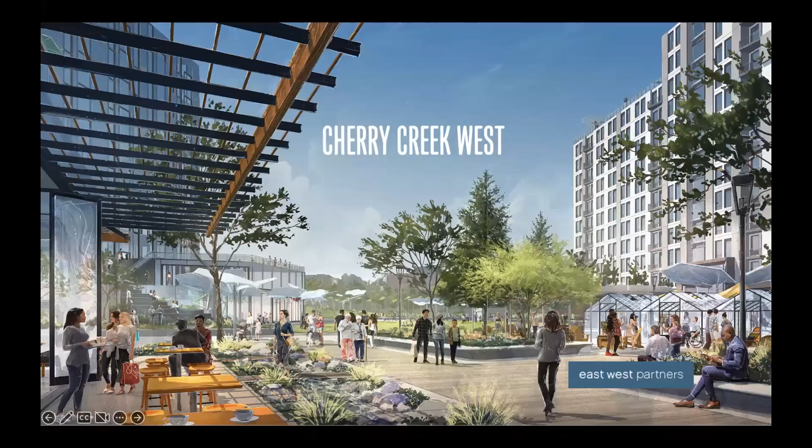Really excited to share with you where we are, and if it looks like I can share my screen, I will go ahead and do that. I assume you can all see that? Okay, great, wonderful. So this slide is one that you guys are all very familiar with.

We'll be speaking through some of our updates. Certainly we have some updated rendering to do, and I'll talk through a little bit about what the changes are that are coming from here. So feel free to ask questions as you go, but what I'll do is start with a little bit on what we've been doing for the last year, and then near the end, I'll talk about what is up to come.

So first and foremost, our progress over the course of the last year. I know you're not used to seeing a lot of narrative from me, but it feels like it might be important, these are the kinds of things that you guys will want to understand.

First and foremost, the large development review is the city's process. Laura Aldrete, the head of planning, has called it the process to determine your process. But really, the idea is that you get all of the different departments that you have to interface with as a developer together, so that they can all identify what their big issues are, and then you can hopefully go into the next stage of the process a little easier.

So that did take us 12 months. It results in a framework that then drives what we do as we move into rezoning and infrastructure planning. The key requests from the city staff were that they were looking for more of a street grid, and I'll show you what that means. It is not the same street grid as Cherry Creek North by any stretch, but it is a diversion from what our plan has today.

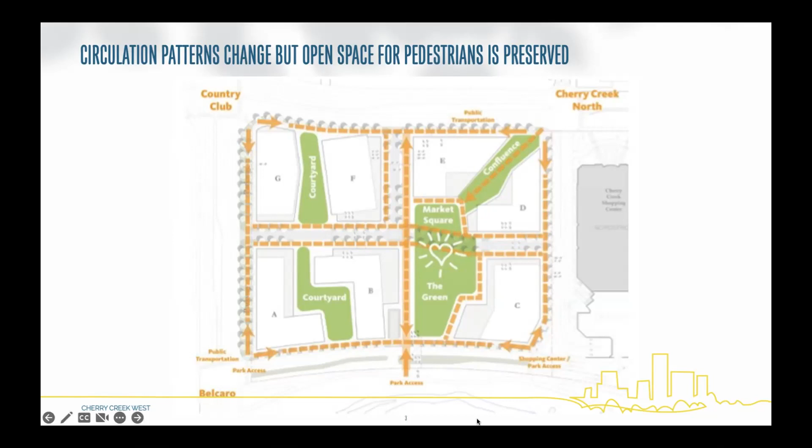In this example, what you might recall is what we had before were these entrances at the edges of each of these four key points. Those entrances will still remain as they are, still right in, right out on University Boulevard, which is really important for mobility and traffic. The same will be true on First Avenue and on Clayton Lane, but we'll have the ability to close those.

There will not be parking on the surface. This speaks again to the fact that it's been very important to us that we don't create a situation where people are circling on and off our site. Instead, they enter the single reservoir of shared parking, which we still intend to have here.

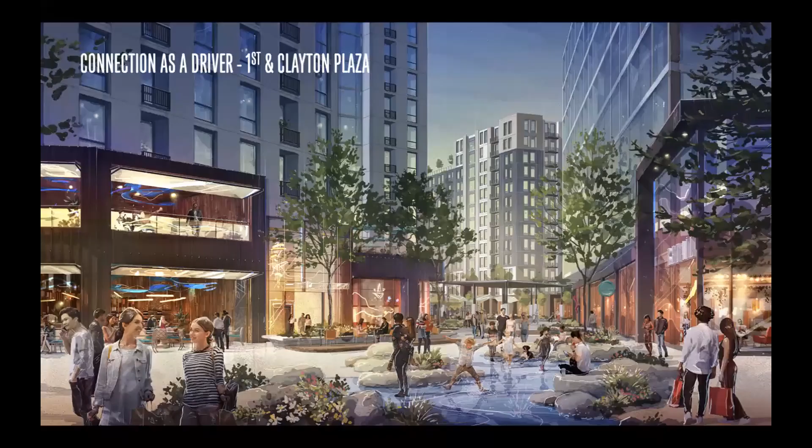So talking about the impacts on our plan: First and Clayton and that entry plaza stay very much the same. The one difference - going back a slide for a second - is that the First and Clayton connection now also has a two-way cycle connection. You can see a green line along Clayton Lane with a northbound and southbound bicycle lane, so if you've been cycling on Cherry Creek North Drive, or want to, you can connect right there and cross at First and Clayton. I think that'll be a nice experience.

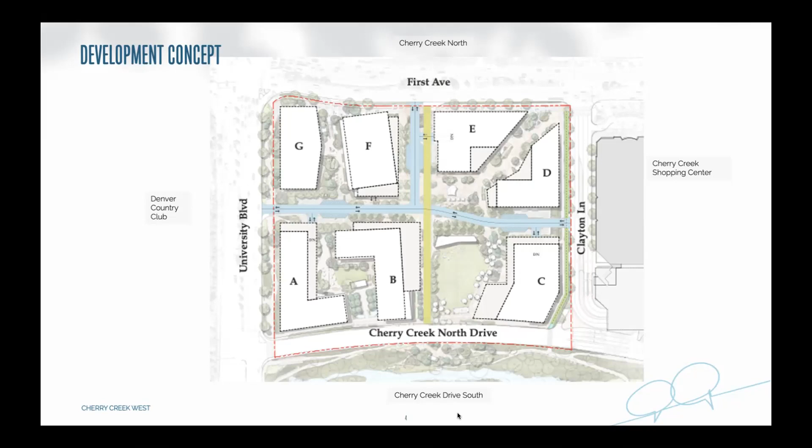We're going to take all of that onto our site because obviously nothing's happening today with the shopping center. It's one of the big sales tax drivers for the city and one of their most successful shopping centers, as I'm sure Jeremy would say if he was on the call today. So otherwise, everything we're planning at the First and Clayton entrance remains as it was.

This particular rendering is going to change a little bit, although as you can see pedestrians crossing freely at grade, looking from the north towards the south, we still intend that pedestrian connection remain flat and at grade, so cars will recognize that pedestrians are prioritized through that space. We'll be doing an update to this rendering, but that's really the difference from what you see here.

Diving into what these streets mean more specifically, when they are fully open, we will have drop-off courts at each of those locations, so that when an Uber or a delivery arrives, there will be drop-off courts at each entry point. Otherwise, if a truck wants to pass through, they'll be able to cross Market Square and the green when things are fully open, although there will be those grade differentials we were talking about.

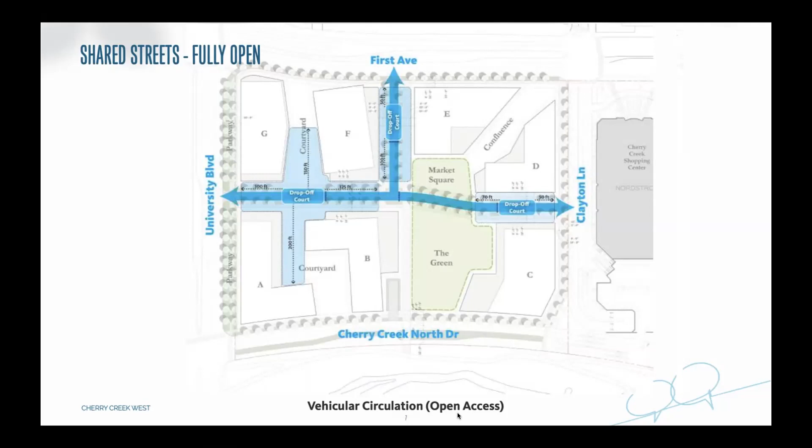You can see those little black lines, but they're actually designed to be bollards. That's where we would have the opportunity to close things off. Here's where that starts to look like what that looks like.

So here is a partial closure. In this case, you would still be able to come in, say, on University Boulevard and exit on First Avenue, but we would close that portion of the street so that Market Square and the green remain fully pedestrian prioritized and cars are not trying to transit across that space.

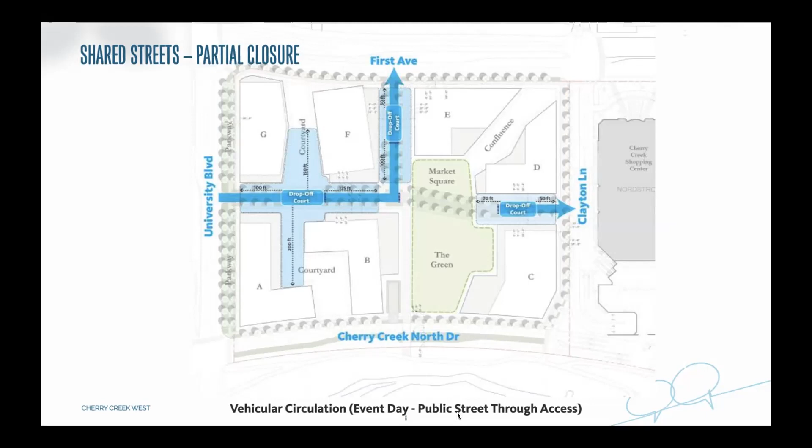And then finally, our fully closed version, this is the one that looks most like what everybody has seen since the beginning, where in the event of a significant event like the farmers market, or really a lot of the other events that could happen here in Cherry Creek West, we can really pull the traffic back and out away from the center of the site. So those are really the three conditions we imagine this can be worked through, and how those streets will function in those components.

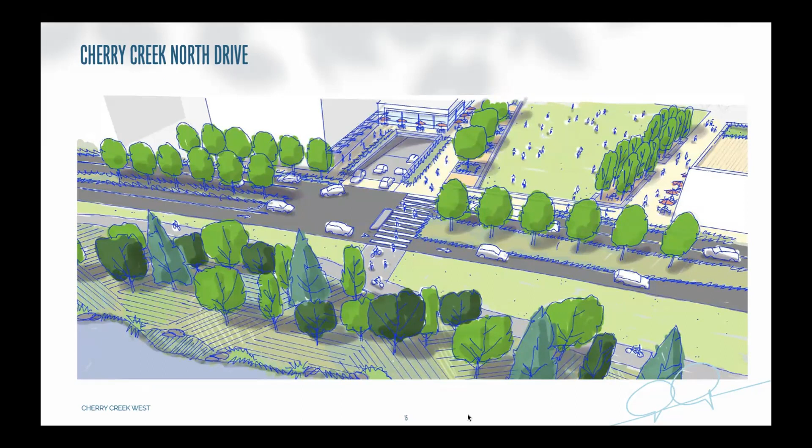Here's another view of that a little bit up close. It doesn't show the little pavilion lid we imagine over the parking, but it gives you a sense of how that crossing might feel from a pedestrian perspective. What this doesn't show is an alternate paving that really shows that as pedestrian prioritized, which we imagine we would have. That would be one alteration we'd make.

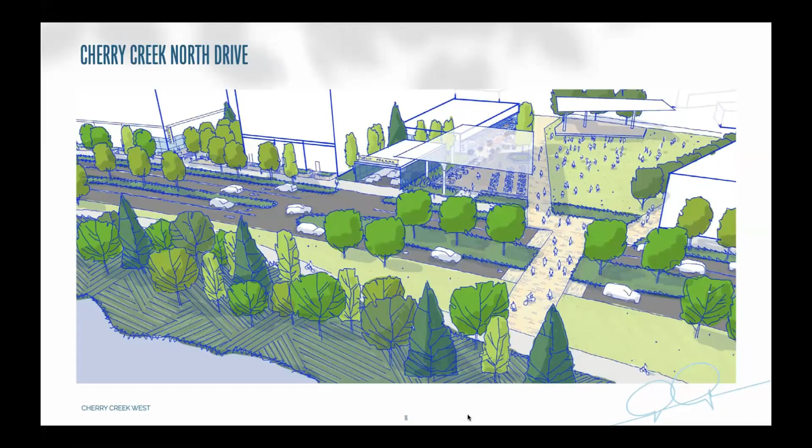This drawing shows that component a little bit better, but shows another possibility where we actually pull that pedestrian access point over to the east a little, allowing separation from the public parking access. That could have benefits from the standpoint of safety and clarity, and it centers that pedestrian connection right on the green space too. It would then potentially have a little additional outdoor space, separate and off to the side, which could be a unique piece. But again, just really starting to study that.

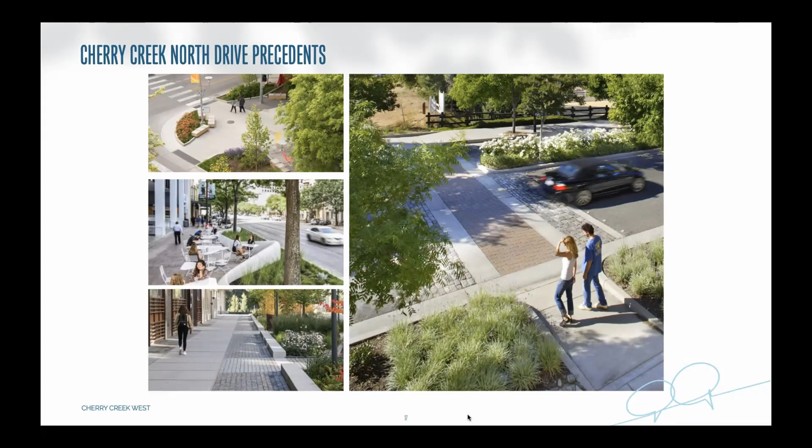I wanted to finish by noting we have not changed our building heights; our buildings remain at the same heights we've been proposing. We're continuing the conversation with a baseline zoning goal of CMX 12, consistent with the planning blueprint and the Cherry Creek area plan for this site. We actually just had a rezoning kickoff call with staff today, and they concurred with that generally.

There's details to be worked out because we really only have two public streets, University and First Avenue, and everything else around us is private. So the devil will be in the details there, but general support for that.

So now stepping into next steps, we've filed a pre-application, which is basically the thing that starts the conversation with the city around rezoning. We have not filed our formal rezoning application because we do want to work through some of these questions about how we deal with the nuance of us only having two public streets adjacent to us. So those conversations will continue this month and into February before we file.

One complexity is that we are part of the zoning for the shopping center right now. So the whole site from Steele all the way to University is one B3 zone lot, and we need to separate out. Taubman has submitted a big document to the city to show that their site can stand alone without our site. Once that all goes through, then we can separate, and that will be key to us finalizing our rezoning.

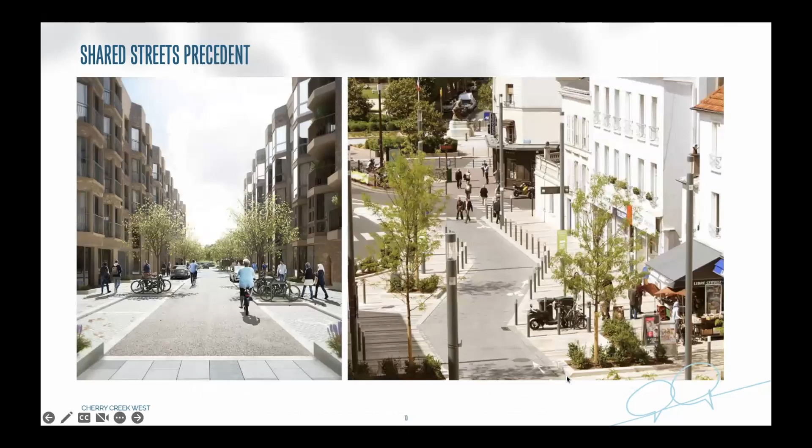I have one other question. If you could go back to the heights slide, and just touch on - so you're looking at initially a CMX 12 as the base zoning. The question is around why there are 13s on here, I'm guessing. Sorry, I can't look at the chat and present at the same time.

So that's just my question. So where that comes from is in the way that the expanding housing affordability ordinance works. When you do high impact compliance, because this is a high impact area, you typically get the right to go higher when you do more affordability or deeper affordability. That would be up to 16 stories.

But as you guys are all aware, there is a Cranmer view plane here, so we are limited to more like 14 stories. What we're proposing is, rather than spread our 12 stories evenly throughout the site, that we have varying heights so we have varying views and can respect some different perspectives through here. A couple of those residential buildings, the two that show 13 stories, would be able to take advantage of that height incentive in that location. So that's how that piece works.

Okay, so does that mean you are or are not going to be using the affordable housing legislation for increased height? We are, but not up to the maximum at all, partially because of the Cranmer View corridor. I know view corridors have been broken before. We have no desire to do that. I don't think it's appropriate here. I think the planning in the Cherry Creek area plan was clear in what's desired here, so we're just looking to take a little bit of it, but not all of it.

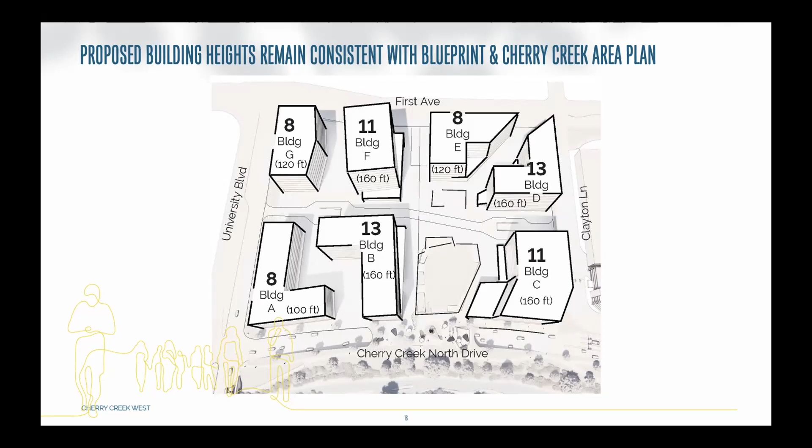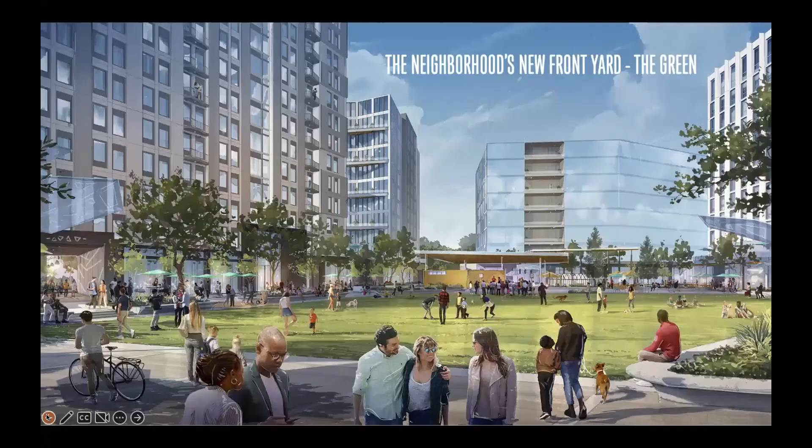I like to try to stay on time, but two other quick questions. These areas where people can pull in, the Uber Lyft areas - if there are eventually micro transit units like you have in Montbello, are those large enough to accommodate the small buses, the micro transit type vehicles that we're hoping at some point would be available within the neighborhood and the area, and maybe even from downtown to Cherry Creek?

I don't know, that's a good question. And also whether that's the right place to do it.

As you guys know, and they're not depicted here, we had this idea that there were pedestrian pop-up locations that would make really obvious places in the parking. There's certainly some possibility that could move below grade, which could be nice for inclement weather or a day that it's 98 degrees, for example. I don't know, but that's a great question.

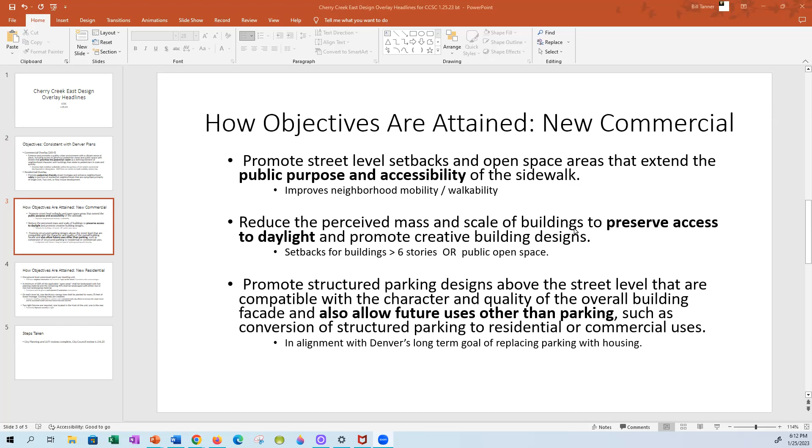On the residential side, one of the nice things about the entire Cherry Creek area is most houses already have porches. This would make that a certainty if the property is rezoned or redeveloped. We've actually had a couple of properties built without porches along Harrison recently, so it would require one unenclosed porch per dwelling unit. The idea is to increase neighborhood interaction and also put more eyes on the street, which is a security measure.

There would be a slight increase in the percentage of open area on properties. It isn't going to take away from the size of the house, but it will change from about 50 to 60% the amount of open space that has to be landscaped. And that again is very consistent with the rest of Cherry Creek.

On each zone lot, we'd have one deciduous canopy tree planted every 25 feet. This has been worked out with the urban forester as the minimum that can be allowed to have a tree growing and stay healthy. That is also considered in alignment with other city objectives to increase the urban forest and its associated health and heat island reduction benefits.

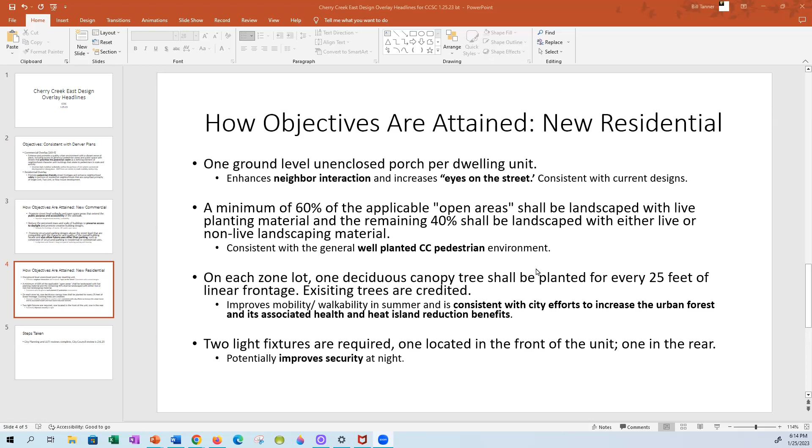There's something that really happens almost throughout Cherry Creek. There would be a requirement that there be one light fixture in the front of the property and one light fixture in the back. Originally, the design was that those light fixtures would come on automatically at night, but that's something the city cannot monitor, so it's just a requirement now that we have those light fixtures. That's really it. It's very light, not a lot of change there.

So far, we've taken this through city planning to have their approval and the LUTI review, and then it goes to city council on February 6th of this year. That's my presentation, really. Any questions or thoughts?

So I'll chime in a little bit because I started my life in Cherry Creek and Cherry Creek East and served on that board and watched it develop. Boy, I think Brooks, it was 25 years ago, maybe more, 30 years ago, that we all worked on what were then design guidelines. We used to have official design guidelines in Cherry Creek East that required that front porch and the lush landscaping, because everything was a PUD back then. So when they put in the new zoning, our design guidelines that we'd all worked so hard for went away.

And that was the impetus for, I think, doing initially the residential overlay to kind of get some of that back. One of the other things the design guidelines required was the pedestrian lighting you see in Cherry Creek East, which is lovely because you have the trees and then you have the moderately scaled lights, pedestrian lights that are in the public space, on the tree lawn.